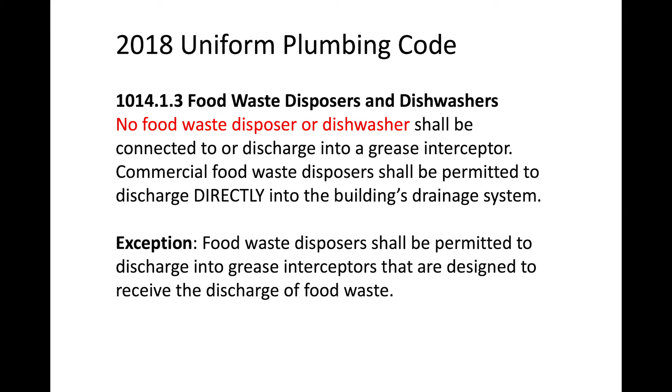Here's what the Uniform Plumbing Code says about food waste disposers and dishwashers: no food waste disposer or dishwasher shall be connected to or discharge into a grease interceptor. Commercial food waste disposers shall be permitted to discharge directly into the building's drainage system. Here's an exception: food waste disposers shall be permitted to discharge into grease interceptors that are designed to receive the discharge of food waste. Most of you weren't at my class yesterday, so you wouldn't know the answer, but I'll tell you - the answer is a residential septic tank being used as a commercial grease interceptor, which you might know as a gravity grease interceptor. They're very good at solids - that's what they do, and this just acknowledges that. So it's in the code that you can do that, but for every other type of interceptor, you have to route directly to the building's drainage system.

The International Plumbing Code says a food waste disposer shall not discharge to a grease interceptor. If we rely on the code, this is what it says.

Now, the Uniform Plumbing Code has had this position for a long time - it was adopted in 2018. I'm the only person up there who would raise his hand to say, I think there's a lot of FOG in that food waste, I don't think this is a good idea. And you know who wasn't there to help? Any of you. The pretreatment community doesn't largely know that they can participate in the plumbing code process. If you're going to rely on that code as part of your pretreatment program, may I suggest you get involved to see what that code says, because that's what you'll have to live with. I could have used some help here - instead there was a line of 30 contractors who all, in their own best interest, said, you know what, I'll probably lose a job if I try to convince that owner to put a solids interceptor in.

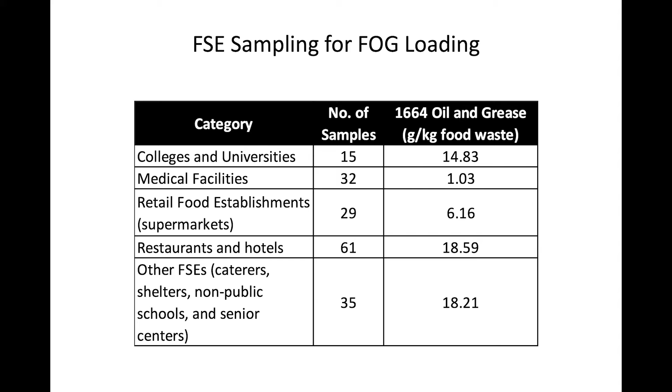But let's find out. So then they decided, okay, let's go ahead and take samples from colleges and universities, from medical facilities, retail food establishments, including supermarkets. Let's take samples from restaurants and hotels. Let's take samples from caterers and shelters and non-public schools, senior centers. A whole big bunch of different types of food service establishments. Let's take samples of all of that food waste that they are currently required to compost or set aside to be composted that gets picked up.

So we have 15 samples from the first, 32, 29, 61, and 35. What did they do? So they take these samples, they take them over to a laboratory, they set up a commercial food waste disposer with a water supply, they start running these samples through this food grinder, and they start taking effluent concentration samples. Is there FOG in this food waste? In the first case, the number is 14.83. Then it's 1.03. Then it's 6. Then it's 18. Then it's 18.21.

Who here is familiar with what our normal numbers are for effluent concentrations? What is it? For our wastewater plant, it's always less than like 0.5, less than 1. Less than 1. Yeah. How do you measure that?

EPA 1664. Okay, so what's being reported here? Did you guys all hear that? So what's being reported right here? What do you see here? Grams per kilogram. What is that measurement for? That's weight. That's a solid, right? So we measure solids that way.

EPA 1664 does not report in grams per kilogram. How is it reported? Milligrams per liter. If I'm looking at numbers, and if you're talking to a group of people who really don't know, like off the top of their head, say 14 guys sitting up here that really know plumbing systems but maybe don't know anything about pretreatment, and you say, look, pretreatment programs are used in numbers like 100 or 200 or 300, but maybe you don't actually say that's milligrams per liter. And maybe you do, but nobody really realizes that this is grams per kilogram, not milligrams per liter, and that there's a difference between those two things. This seems pretty low if I'm comparing it to 100, right?

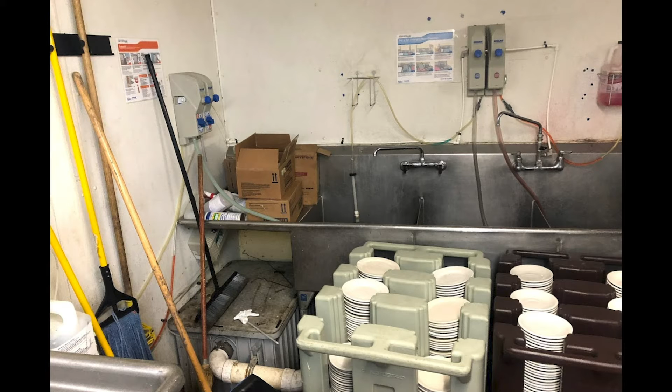I was at the end of that. He takes me back and he shows me, he says, let's dispose of it. Because I said, look, this is a jar, it has oil and water and soap in it. Dean, do you want to just dump this down the sink? Obviously not. So he says, let's go back in here to this kitchen and let's take a look. And so what do we find? Well, we find this grease interceptor sitting right here. And this is their what? Yeah, that's their 3-comp sink. And this was a bunch of plates already stacked up and washed and clean and beautiful looking.

And we open this up. Dean, you got to help me out here. I don't remember there being a lot of grease in there. Exactly, there was hardly any grease in that thing at all. So I'm like, how do you think they operate this kitchen?

He says turn around, so we turned around. And literally on the other side of the kitchen is this tray here, and all these pots and pans stacked up, trays here, and some sauce sitting on this side of a thing. And somebody didn't eat their breakfast, I guess. Look, if you're going to take that much food and not eat it... anyway, I'm joking around. So obviously this is where all the dirty pots, pans, plates, trays, all that's being done.

What is this? Can you see it? I know, I'm doing it only on that screen. Can you see what's in this over here? That's a sink. Normally, previously, it had a commercial food waste grinder underneath it. Does that surprise you that all of these dishes are going to be washed, rinsed, scrubbed down, and prepped

for going through what, the dishwasher. So they're prepping the dishwasher. Now here's what the code says: a dishwasher connected to a pre-rinse sink. This is a pre-rinse sink, right? So this dishwasher is connected to a pre-rinse sink,

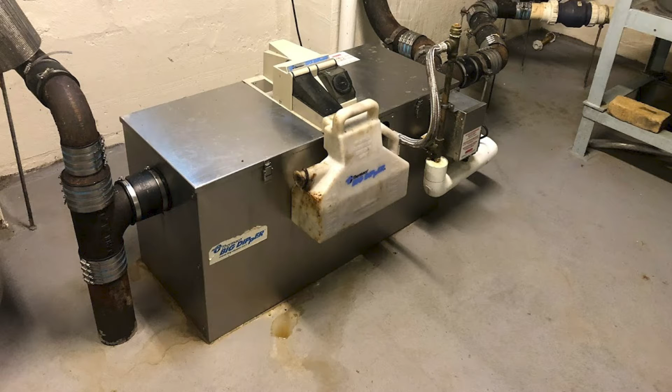So I go into this facility. This is the Peresky Commons, their food facility. We start taking a look. We go into the basement, and this is their grease interceptor. It's a Big Dipper 750, a 75 gallon per minute automatic grease removal device.

It's working perfectly fine, except what I noticed was there's a lot of gray water in here, and I didn't see any grease in that. So my first question, for those of you who don't know anything about automatic grease removal devices: this tank has to fill up first, because these skim grease off the top. If you don't let it fill up with grease, there's no grease to skim off. If you let it run when there's no grease, you just fill up the container with wastewater.

So I'm asking, how often are you running this thing? The guy said, I don't know, like 20 hours a day. It's never getting any grease in it. So you get a little bit of grease in this container, and the rest is just wastewater.

Anyway, this is working just fine, but it's in the basement, and you've got two stories. It has a basement kitchen, a first floor primary kitchen, and a second floor kitchen. They have huge facilities, two giant buffets. The main floor kitchen is a buffet out front, and the second floor is a huge buffet, with all kinds of menus, so the kids have about 35 different restaurant-type choices of food there. It's pretty big.

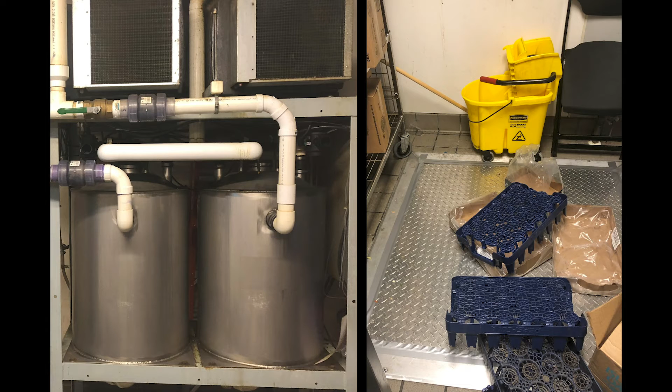The downstairs, or basement area, is fed by these tanks here. In other words, these tanks are the gravity tanks that feed that interceptor. These tanks are elevated, and they receive their grease from buried tanks that receive all the wastewater from the rest of the facility. So my job was, tell us, where's the grease coming from?

All of the fixtures in the building are connected to that interceptor. So I'm like, okay, well, let's just validate that — are they all connected to this interceptor? That interceptor is fed by these tanks. Those tanks are fed by two buried tanks right here. Those tanks receive all of the greasy waste from all the fixtures that are in the basement.

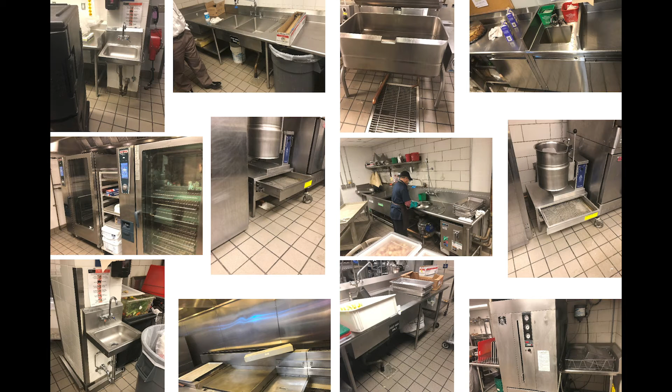These are all the basement fixtures. I don't know if they're all the basement fixtures, but there are a lot of them. Throughout all the research, I only found that the floor drains, predominantly the floor drains, were the only things not connected to that device. Only the floor drains. So everything else was going there.

So I'm thinking, that's interesting — like 100% of your fixtures are going to that? Well, it's not quite 100%, but there's a lot here. You can see all the different types of fixtures. This is all in the basement.

Here's your 3-compartment sink. A little clue, though — I started to notice this guy down here. What is all of this? Let me see if I've got a picture of this. Yeah, so here's our 3-comp sink operation, and this gentleman's working it here. I don't know what this thing is — I've never seen one of these before.

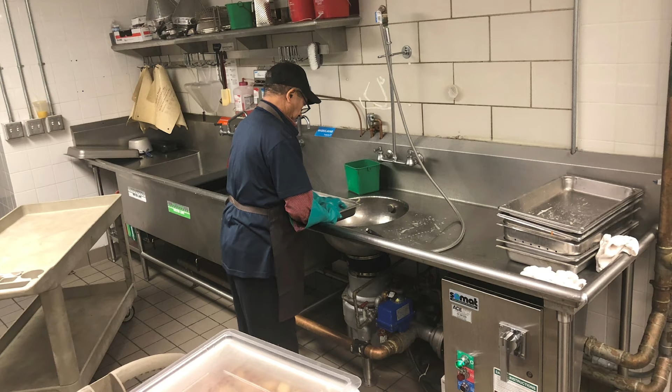This word here is SOMAT. Can you see that? I know I'm totally focused on this side of the room — sorry to you guys on this side. This word over here is SOMAT. So that's like a system then. I'd never heard of a SOMAT system before, so I had to look it up — what is this SOMAT system and what does it do?

Well, this happens to be a giant grinder, as you can see by its size — pretty big grinder — and it feeds somehow to this SOMAT system. That's interesting. And then there's a drain pipe here that connects to a floor drain indirectly. Okay, that's interesting, and that's what I'm trying to show you — here's the indirect connection that comes out of both the sink and the SOMAT system.

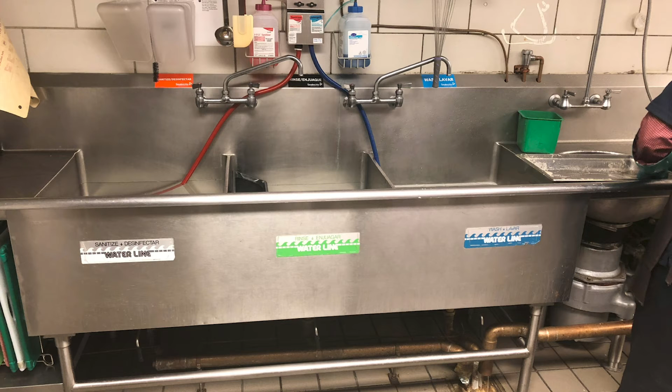Okay, now we go upstairs, and I start looking around at the fixtures upstairs. Where's all the grease coming from? Most of the operations upstairs, the two big kitchens, have these giant conveyor belt type dishwashers. Sorry, my brain may cramp a couple of times — feel free to yell out a word to help.

I get to make all the early mistakes since I'm the first presenter, and I'm happy to just do that. I'll make them all so the rest of you presenters have it easy after me.

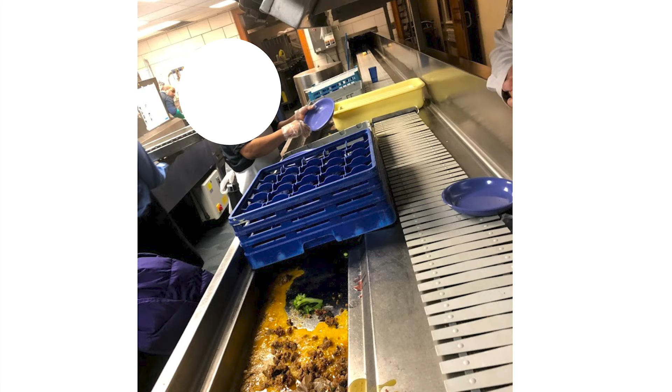So I'm looking at this operation, and on this side we see people putting dishes on this conveyor belt, moving dishes across. This nice lady picks up the dish off here and scrapes it into this trough-looking thing. And it's got food in it, lots of food. Looks like taco meat and broccoli.

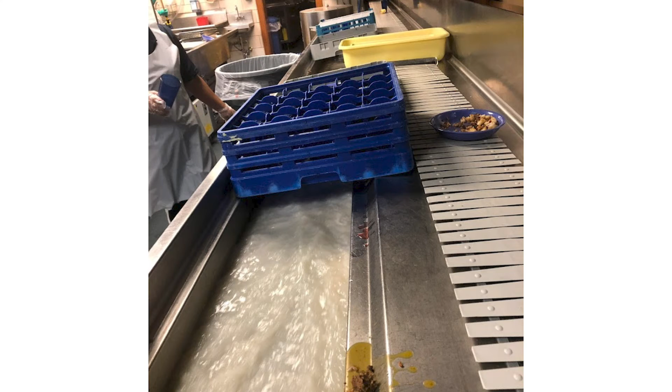So my first question is, I see all this food here, how do you get rid of it? And she says, well, we turn on the river. Okay, that's a fun term, let's see what that does. So she walked over, hit a switch, and this thing starts flowing like a river, with a pretty good pace to it, a scouring pace. So all that food just gets washed away.

So my question's going to be, that's great, that's neat, now where does that go? She says, well, that goes into this thing. Well, what is that thing? Well, that's a pulper. What's a pulper do? She says, well, that grinds up all of the food waste that comes out of the river.

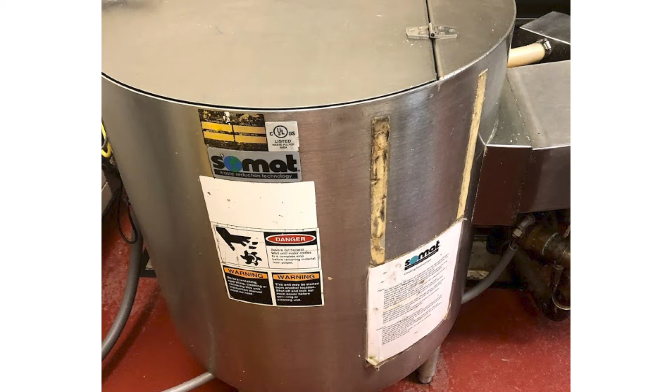All right, so let me make sure I follow this. You guys scrape all the food from all the dishes, pots, and pans that you're going to run through that dishwasher behind you, right? She says yes, and it all goes in this trough. And then you turn a lever and a river flows in this trough, yes. And that river goes to that, and she said yes. And then that thing grinds it up, and she says yes. Sounds like we're on the same page so far.

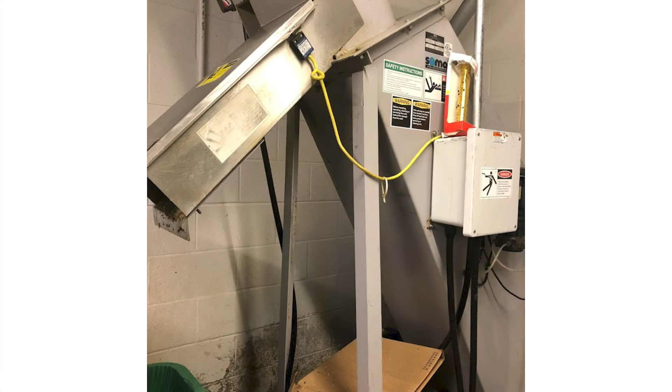I'm sorry about that, Adam. It takes the food that's dewatered now, and runs it down this chute into this bin, and then some local pig farmers come and pick that food waste up. Okay, this is making sense. So where does the wastewater from this thing go? And she goes, well, it goes back into the system.

So that's like a closed loop system? Yep, that's what that is. Okay, so I go upstairs to the second floor, and there happens to be another one, doing exactly the same thing. So now I've got three of these operations, all connecting somehow to this SOMAT system. One, the basement one's got that food waste grinder that was very open and obvious. These others had pulpers, which you can't see what's going on in there. So now you know what's going on in there, it's chopping up food. So that's three locations all with that.

So I called up SOMAT and said, I'm really confused here, can you help me understand how your system works? And they said sure, so here's a schematic of it. I won't bore you to tears walking through all the details, but suffice it to say the schematic shows three floors and a closed loop with pumps. So the pumps are going to keep that system going, keeping the wastewater moving through the system, and that always is going to be recycling.

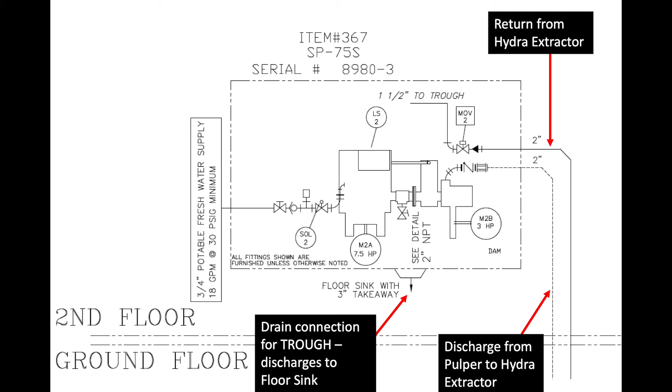But what you'll notice here is right at the bottom. What does this say? What's that say at the very bottom? You probably can't see it at the back: floor sink with 3-inch takeaway. So the systems have a discharge point at the first floor, the second or top floor, main floor, and basement all have a discharge point, and that discharge point says floor sink with 3-inch takeaway. How do we connect to a floor sink? Directly or indirectly? So that indirect connection I saw in the basement was a bit of a clue, wasn't it?

So this is the second floor, and then this is the basement. And all of that is a closed loop system. So here's a great question. This is the final piece. This is the Hydra extractor.

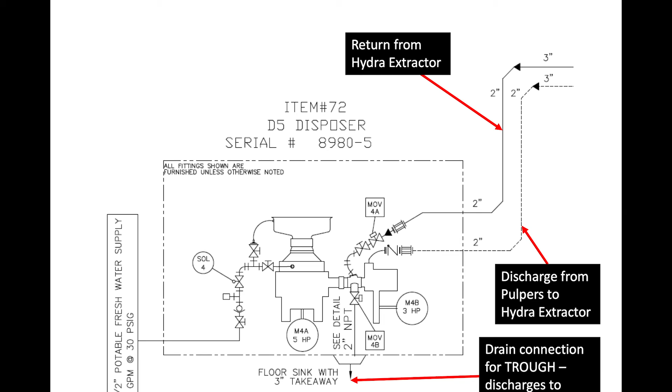When it finally gets to that, the question then is, what happens at the end of shift when you're done running the river and cleaning the pots and the pans and the plates and the silverware and all that stuff? What happens? We turn the system off. Okay, that makes sense. Then what?

Well, we have to drain it. Well, how do you do that? Well, we pull this plug. Well, where does that go? Just confirming what the schematic says, it goes to the floor drains, those floor sinks that are indirectly connected.

You know what the code says? This is a Uniform Plumbing Code state, and the Uniform Plumbing Code says thou shalt not discharge a food waste grinder through a grease interceptor. So where's all that greasy waste going? It's going directly to sanitary.

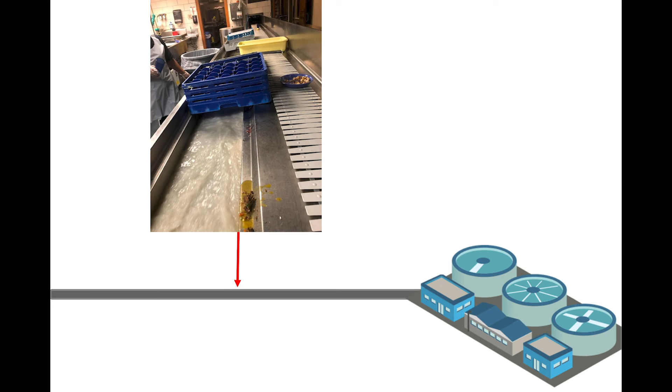So when the facility said, I have all my fixtures connected to an interceptor, do they? No, they don't. All those fixtures, we might look at all those fixtures and say, wow, if all of those fixtures are connected to a grease interceptor, they're getting all their grease waste. Except, where's really all their grease waste going? It's going here. And where's all of this grease waste going? It's going directly to sanitary, which is going to the collection system, which means how much are we capturing and how much are we not?

So I did some numbers to try to find out how much grease we're producing here. They're a cafeteria, basically, with fryer, with flatware, I just ran this math. So that's a 0.0455 multiplier for that general basic overview menu. That's like the big catch-all that I would use for grease production.

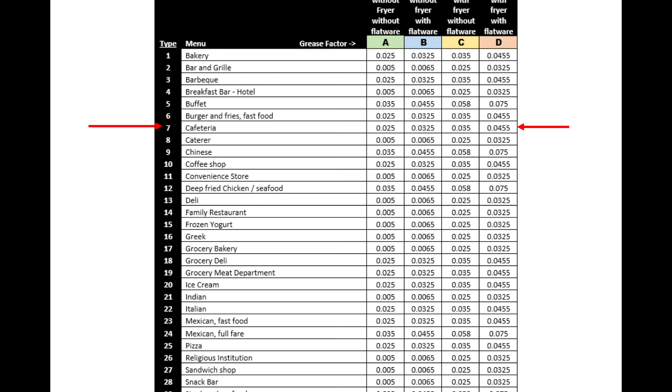And I ran the numbers. How much grease are we using? Well, we use 0.0455. How many customers or meals per day? That's not too tough: 1,100 students plus faculty and staff. So that's around 3,571 meals per day. Well, that means it's 162 pounds of grease per day being produced.

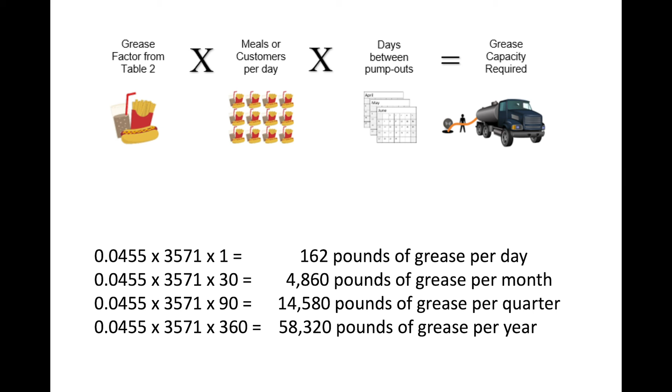The vast majority, the overwhelming majority of that going through the SOMAT system. In 30 days, that's 4,860 pounds. In 90 days, 14,580 pounds. In 1 year, 58,320 pounds of grease. How much is that?

Come on, at some point that's just a really big number, but how much? What does that even mean? Is it meaningful? I have to look at that. All right, that's a 55-gallon drum. Can you at least picture what that size would be, roughly, right? About this big. Well, that's 3 of those per week with grease, dumping directly into the collection system.

That's 12 per month, 48 per quarter, 144 of those a year.

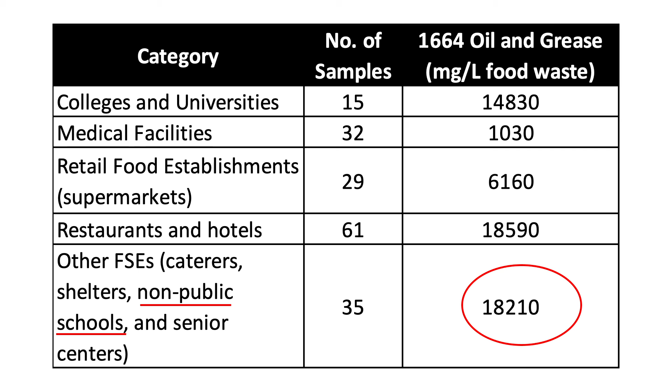I did a secondary comparison using the math that came out of the New York study: 18,210 milligrams per liter for a non-public school, using 11,200 gallons of daily water. Estimated 10% was running through the SOMAT system because it's closed loop, not continuously refeeding it. That's 0.0151. If I multiply that out: 169 pounds a day, 5,000 per month, 15,000 per quarter, 60,000 per year.

Pretty close between the two, wouldn't you say? That's two ways of looking at how much grease we're producing from this facility. Two very different ways of looking at it, and yet both of them corroborate each other very closely.

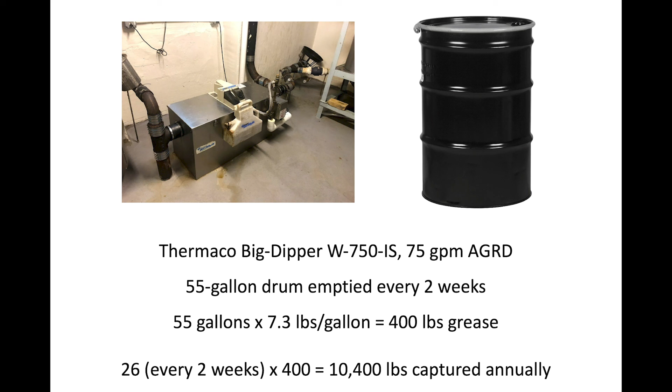Thermaco, if we try to figure out what they're actually capturing, if we were being very generous here about how they're doing this, they've got this Thermaco Big Dipper W-750-IS at 75 gallons a minute. They're filling up this drum, they say, every 2 weeks. 55-gallon drum emptied every 2 weeks. Let's assume that was full of grease.

We know that's not true, but let's assume for their sake that it is. 55 gallons times 7.3 pounds per gallon is 400 pounds of grease in that drum. 26 every 2 weeks is 10,400 pounds captured. So I'm just going to say, being super generous here, they're probably capturing about 10,000 pounds.

They're creating about 58 to 60,000 pounds. So what percentage is that that's going directly to sanitary? Capturing, with my generous math, 17%, we're discharging a whopping 82% of the grease load directly to sanitary.

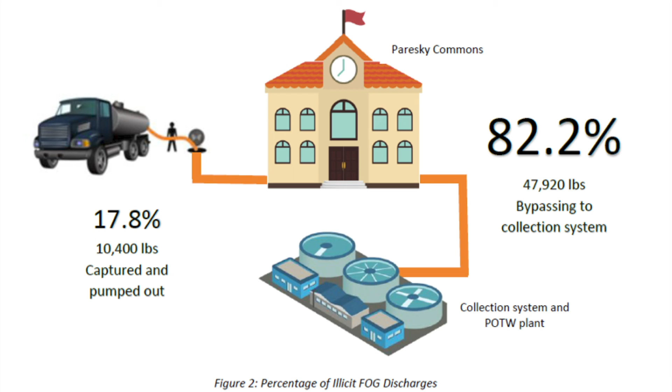So that's why I asked the question, is there FOG and food waste? Yeah, there's FOG and food waste. And so the whole idea that we let the plumbing code decide for pretreatment whether or not we should have food waste grinders routed directly to sanitary is bad policy. It's very harmful for pretreatment.

So I encourage you to do something about that, get involved in either helping us to change the code or fix your ordinance and supersede the code. Don't allow food waste grinders in your ordinance. All right? That's pretty much it.